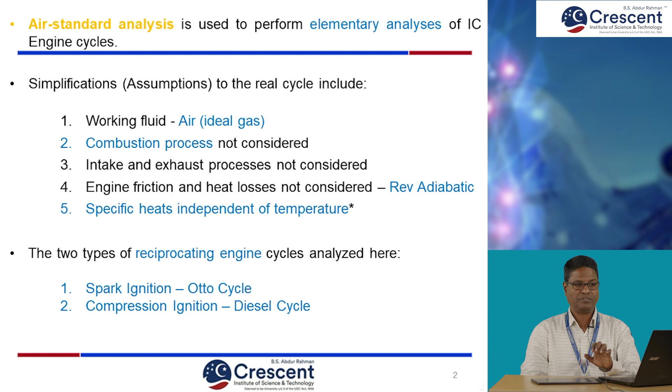Basically, the air standard cycles we will be covering today: the spark ignition engine following the Otto cycle, and the diesel cycle, which is followed in compression ignition engines or diesel engines. These two cycles we will be covering today. Okay, we will start with the Otto cycle. The Otto cycle has to give a net work output. Obviously, when you are looking for a work output, there should be an energy input. So, here fuel energy is taken as an input, which when it is burned gives heat energy. Heat energy will be converted into work output.

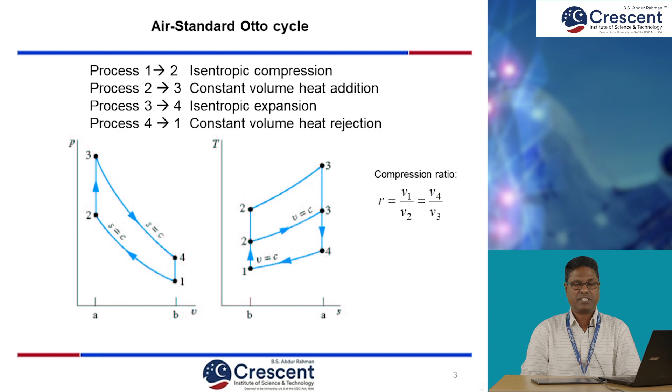In the thermodynamic cycle analysis, air standard cycle analysis, we have the Otto cycle where we have essentially 4 processes. We have process 1 to 2 as an isentropic compression, 2 to 3 as a heat addition process, which is happening at constant volume, process 3 to 4 which is an isentropic expansion again, and 4 to 1 is a constant volume heat rejection.

On the screen, you have a PV diagram as well as a TS diagram. In the PV diagram you can see that process 1 to 2 is shown as S equal to constant, which is a reversible adiabatic compression process. Reversible adiabatic we call an isentropic process. The process 2 to 3 is where volume is constant, where heat addition is happening at constant volume. And 3 to 4 is a process where expansion is taking place, reversible adiabatic expansion, where entropy S is constant again. And 4 to 1 is a heat rejection process, again happening at constant volume.

The same processes are explained in the TS diagram also. 1 to 2, where entropy is constant, we can see a vertical straight line. 2 to 3 is a heat addition process where temperature rises, which you can see from the diagram. So, there is a rise in temperature. And 3 to 4 is an expansion process, isentropic expansion, where again entropy is constant, a vertical straight line going downwards, and 4 to 1 is a heat rejection process happening at constant volume.

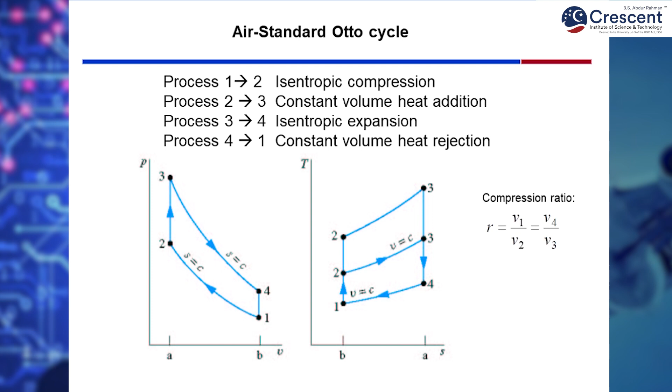Here, when you do the cycle analysis using air as the medium, we will be introducing a term called compression ratio. Compression ratio is nothing but the ratio V1 by V2. V1 is the initial volume, V2 is the volume at the end of compression. This ratio we call the compression ratio. And we are trying to derive an equation for the efficiency of the cycle. We will be deriving the cycle efficiency equation in terms of thermodynamic properties, how it can be derived.

So, before going to the derivation part, let us discuss the Otto cycle. The Otto cycle is an air standard cycle, and as I said, this Otto cycle will be followed in the spark ignition engine, which is basically a petrol engine. I will explain the Otto cycle first and then connect how the actual cycle is followed in a petrol engine, then we will see the differences. In the bottom diagram you can see the Otto cycle.

Basically, these automobile engines, piston engines, will have a piston cylinder arrangement. The piston will have a reciprocating motion inside the cylinder. When the piston is moving down, the air-fuel mixture, you can see here, is taken inside; the inlet valve is opened, and there will be one more valve, the exhaust valve, that will be in a closed position. So, the air-fuel mixture is taken inside and the piston is moving down. We call this the suction stroke. The suction process is carried out, the air-fuel mixture rushes into the engine, filling the cylinder. So, that is a process.

In a thermodynamic cycle, we may not show this suction process and exhaust process. So, what we start with is process 1 to 2, which we refer to as an isentropic compression process. So, in the diagram, we start with the compression process in the Otto cycle.

Process 1 to 2 is when the piston is moving from bottom dead center to top dead center; the compression process is carried out, and we assume this is happening as a reversible adiabatic compression. So, compression process is carried out.

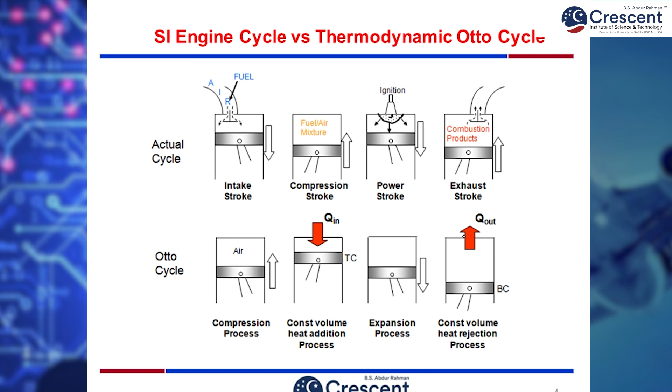So, we will try to derive the equation for thermal efficiency. Before that, there is a slight difference between the actual cycle and the air standard cycle, which is a theoretical cycle. In the theoretical cycle, we assume the process 1 to 2 will be taking place as reversible adiabatic. In the real case, no process could be a reversible process, there will be some deviation, and the combustion will be taking place at the end of compression, at constant volume.

So, pressure versus volume displacement is shown here, and in the ideal cycle we show it as a straight line, but in the real case it may not be straight, because volume is not going to be constant, because the piston is continuously moving. The piston inside the cylinder will not stay for a moment, it will be continuously moving.

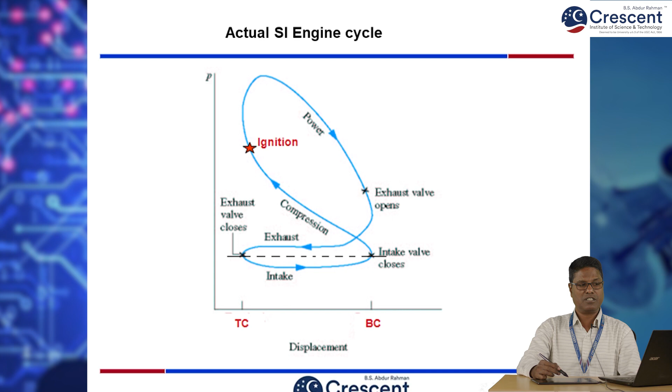So, there will be a slight deviation, and volume is not exactly constant, and moreover ignition will be happening at the end of the compression process in the theoretical case. In the real case, it will be slightly different. Just before it reaches top dead center, ignition will be initiated, so combustion will take place. So, there will be a slight difference between the actual cycle and the ideal cycle, and moreover the theoretical cycle we analyzed, that is the Otto cycle.

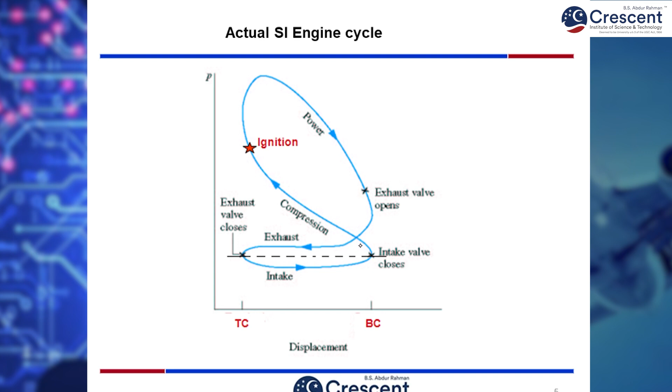This intake process and exhaust process we have not discussed. We started with process 1 to 2, that is the compression process, and heat addition process, and then expansion or power stroke and the exhaust process. The intake and exhaust processes we have not considered for the theoretical analysis, but in the real case they will be. So, with this background we will go for the equation derivation for thermal efficiency of an Otto cycle.

If you look at the thermal efficiency equation, this is work output by energy input. Work output will be net work done. In the net work done we have expansion work and compression work. This difference will be net work, and the energy input is in the form of fuel energy we are giving. So, that is heat added at constant volume.

So, W net could be written as Q net from the first law of thermodynamics. Q net can be written as Q in minus Q out, heat in minus heat out, divided by Q in. This denominator will be Q in. So, if you rewrite this equation, it will be 1 minus Q out by Q in.

Okay, Q in is a heat input, Q out is a heat output, heat rejected we can say. From the first law of thermodynamics, we will find out what is Q in and what is Q out. Then we will substitute this in our efficiency equation, so that the efficiency equation can be derived in terms of thermodynamic properties.

So, Q in, heat addition, is happening in process 2 to 3, which is a constant volume process. First law of thermodynamics says dq equals du plus dw, where dq can be written as q 2 to 3. Process 2 to 3 is the heat addition process, w 2 to 3 is the work done for process 2 to 3, and del u is the change in internal energy for process 2 to 3. If you rewrite this equation, q minus w will be del u.

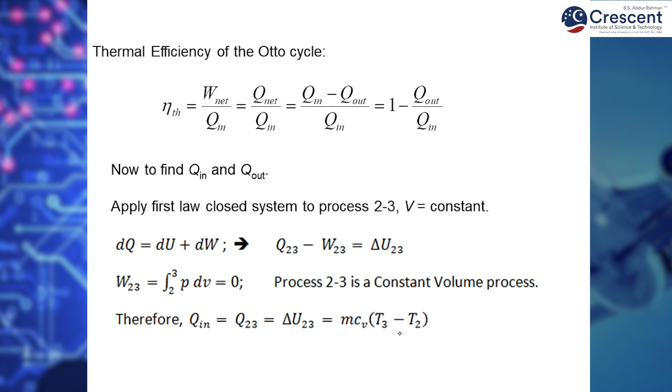And similarly, we can find out heat rejection also. Again we use the first law of thermodynamics, dq equals du plus dw. Applying it for the process 4 to 1, q 4 to 1 minus w 4 to 1 should be equal to del u 4 to 1.

Again, it is a constant volume process. In the thermodynamic cycle we are discussing, which is the Otto cycle, both heat addition and heat rejection happen at constant volume. So, for a constant volume process, work done is 0. Leaving this work done parameter, we will have only heat transfer equal to del u 41.

Del u 41 is the internal energy change for process 4 to 1, which could be written as mCV T1 minus T4. T1 is the temperature at the inlet and T4 is the temperature at the start of the heat rejection process. So, Q out you can write as mCV T4 minus T1.

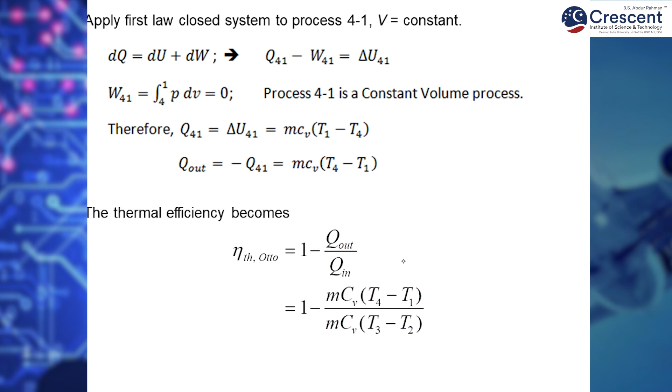If you substitute Q in and Q out in the thermal efficiency equation, the thermal efficiency of the Otto cycle could be written as 1 minus Q out by Q in. Q out we just derived as mCV T4 minus T1, and Q in as mCV T3 minus T2. If you simplify, mCV gets cancelled, so 1 minus T4 minus T1 by T3 minus T2.

If you rearrange this equation and take T1 out, it will be T1 into T4 by T1 minus 1 in the numerator. In the denominator, you can take T2 out, so it becomes T2 into T3 by T2 minus 1. Here we have processes 1 to 2 and 3 to 4, both isentropic: 1 to 2 is isentropic compression and 3 to 4 is isentropic expansion.

For isentropic processes, this relation is known in thermodynamics. For process 1 to 2, the temperature ratio T2 by T1 can be written as V1 by V2 power K minus 1, where K is the ratio of specific heats, Cp by Cv.

In some books they may write it as gamma, so you can use either gamma or K. Let me use K representing the ratio of specific heats. So, T2 by T1 could be written as V1 by V2 power gamma minus 1. Remember, we have already defined V1 by V2 as the compression ratio.

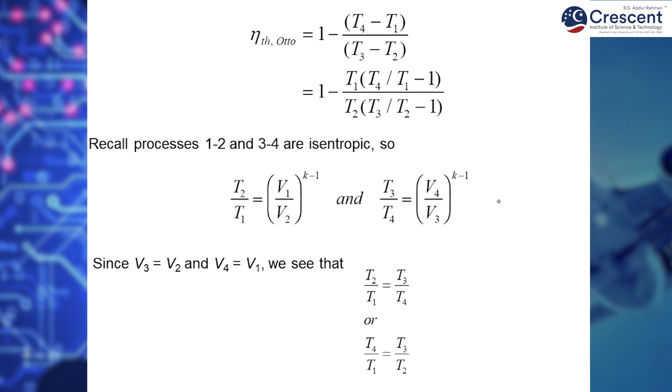So, this T2 by T1 can be written as R power K minus 1. And similarly, for process 3 to 4, which is again a reversible adiabatic expansion process, T3 by T4 can be written as V4 by V3 power K minus 1. Here we know that V3 equals V2 and similarly V4 equals V1; 2 to 3 is a constant volume process and 4 to 1 is also a constant volume process.

So, here V1 by V2 could be written as V4 by V3, because V1 and V4 are the same, V2 and V3 are the same. In that case, T2 by T1 can be written as T3 by T4, or if you rearrange this equation, T4 by T1 can be written as T3 by T2. So, if you look at this efficiency equation, we have 1 minus T1 into T4 by T1 minus 1 divided by T2 into T3 by T2 minus 1.

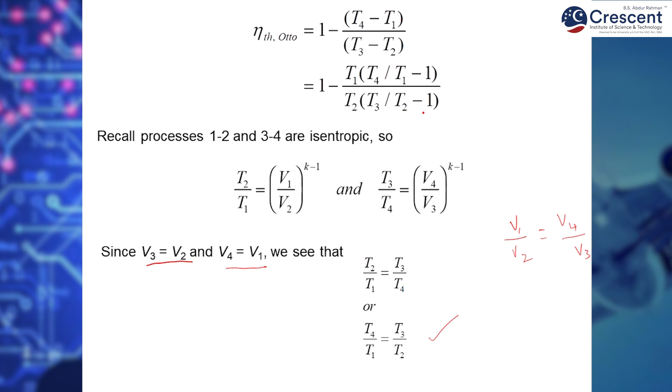Here we have T4 by T1 and T3 by T2, and we have just seen that T4 by T1 is equal to T3 by T2, meaning the bracketed term can be cancelled. What remains is 1 minus T1 by T2. What is this T1 by T2? We have already seen T2 by T1 as V1 by V2 power K minus 1. Remember, K is the ratio of specific heat, which is a constant.

So, T2 by T1 for an isentropic process can be written as V1 by V2 power K minus 1, and what is required in the efficiency equation is T1 by T2, the reciprocal of this, which is V2 by V1 power K minus 1. Remember, V1 by V2 we have already defined as the compression ratio, R equal to V1 by V2. So, T1 by T2 can be written as 1 by R power K minus 1.

So, the efficiency equation becomes 1 minus, replacing T1 by T2, 1 by R power K minus 1. This is the final equation we get. Efficiency of the Otto cycle can be given as 1 minus 1 by R power K minus 1, where R is the compression ratio and K is the ratio of specific heat.

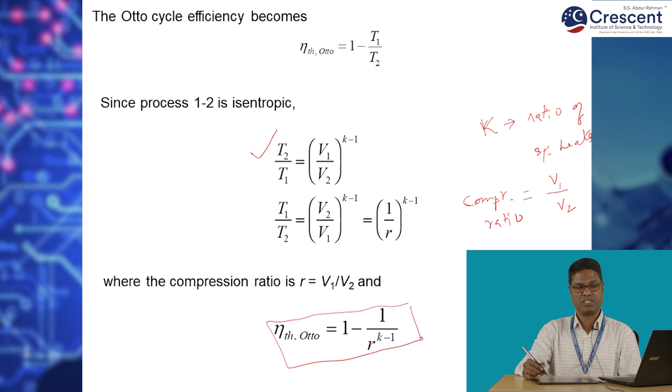If you look at this equation more closely, K is the ratio of specific heats, which is a constant. The only variable in this equation is R, the compression ratio, which we defined as V1 by V2. This V1 by V2 gives the size of your engine. So, based on the size and dimensions of your engine, the efficiency can be altered; to increase the efficiency, we have to increase the compression ratio. For increased compression ratio, efficiency will be higher.

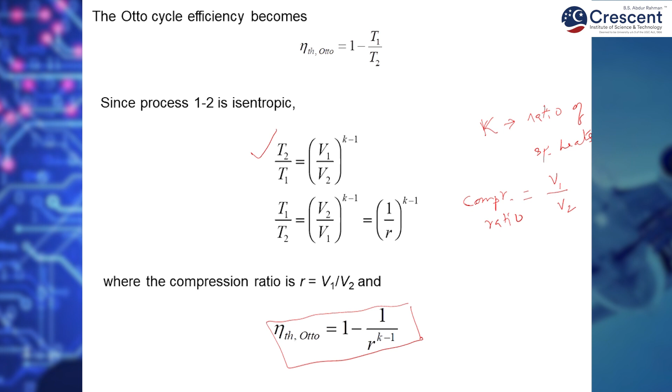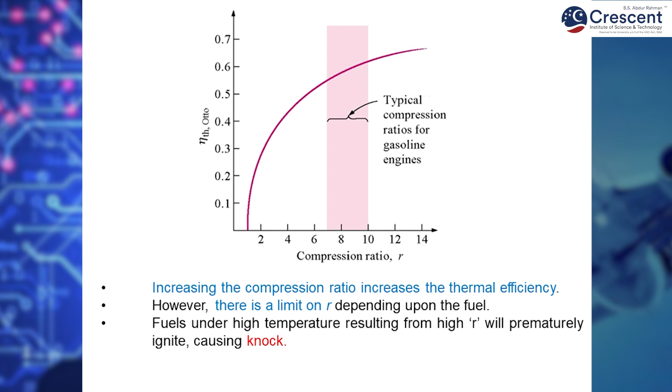Remember, in the Otto cycle or spark ignition engine, we have to ignite the air fuel mixture to initiate the combustion. So before the spark plug fires, auto ignition of fuel will take place. That leads to abnormal combustion, which we call the knocking effect. It happens beyond a certain range of compression ratio values. To avoid that, we have to limit the compression ratio.

The corresponding efficiency for a compression range of 7 to 10 is close to 50 to 60%. This is possible for an ideal case. In a real case, it will be much lower, closer to 35%. So that's about the Otto cycle.